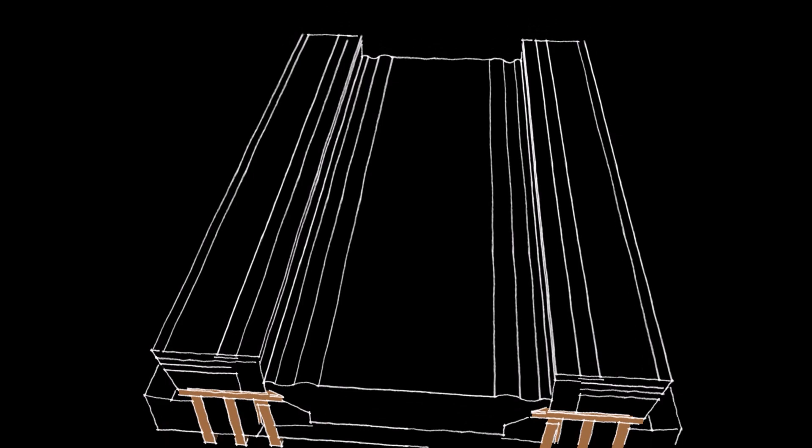The canals of Amsterdam, the pride of the Dutch culture, and the symbol of conquering nature. Did you know that those canals are protected by walls that are built on top of wooden piles? Those walls are called quay walls. Amsterdam has a belt of 165 canals with a total length of 600 kilometers of quay walls.

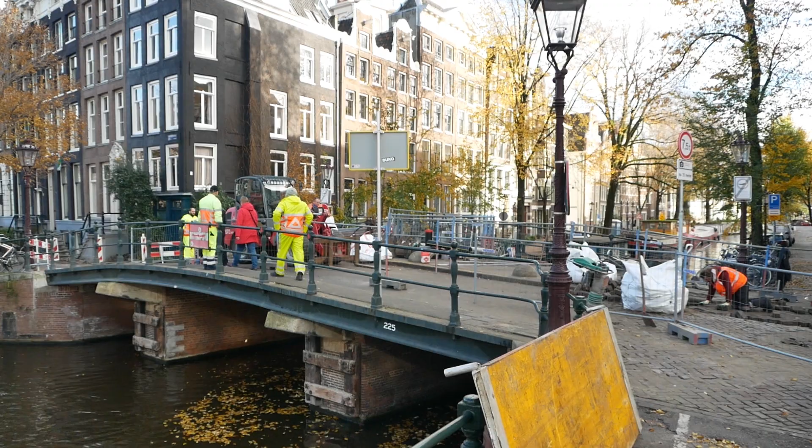Unfortunately, the quay walls in Amsterdam are falling apart since many of the wooden piles have shifted, cracked, or collapsed under the continuous pressure. Therefore, the municipality renovates the quay walls of Amsterdam over the coming 30 years to keep the city safe.

Since we are renovating them anyway, could it not be a chance to rethink the quay wall of the future? Imagine if this amount of quay walls can be utilized through harnessing energy. Since Amsterdam aims to be a natural gas-free city by 2040, could it be a good opportunity to integrate energy systems in the renewed quay walls?

A potential energy system for implementation is thermal energy from surface water, in Dutch called TEO system. This system has proven through research that it could provide 40% of the built environment's heat requirements in the Netherlands. The system retrieves heat from surface water bodies, like lakes, rivers, and canals. In this way, the houses of Amsterdam could be heated up and cooled down by your beloved historical canals.

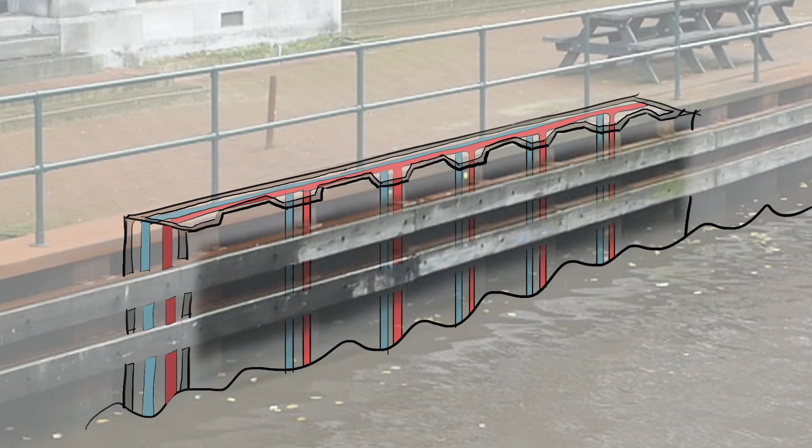But how does the system exactly work? There are two different types of TEO systems, open and closed. In a closed system, the heat exchanger is installed in the surface water. The liquid in the system does not come into contact with the surface water itself. The temperature of the heat is then increased by a heat pump and then transferred into the building.

Open TEO systems extract surface water, take the heat and discharge the water back into the water body. The temperature of the heat is then increased by the heat pump and then transferred into the building. Closed systems are usually installed on a smaller scale compared to the open systems.

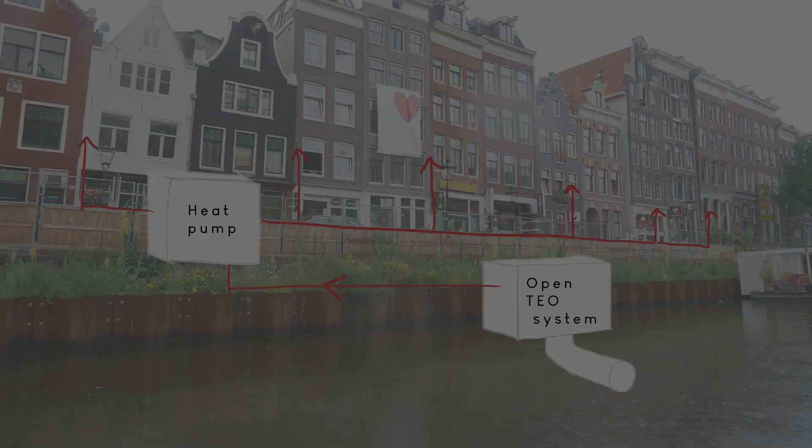The heat can be stored underground by aquifer thermal energy storage, also called ATES. This way, we can extract the heat in the summer and extract the cold in winter and save it for later. Even though the system already works and it is proven to be effective, why is the implementation so far away from the present? We talked to several experts of TEO systems and asked them the question, what is the main challenge for implementing a TEO system in the quay walls of Amsterdam?

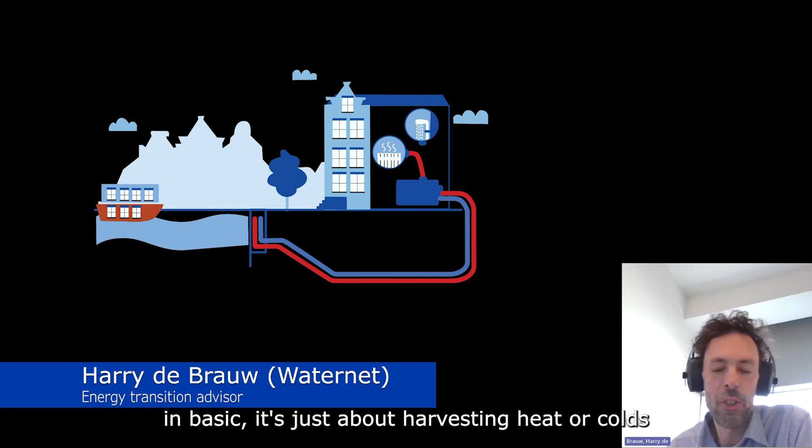You already know the TEO system and how it works, but we would like to know how you would define the TEO system. Okay. In basic, it's just about harvesting heat or cold from surface water. Period. And in practice, it means you want to utilize it, so that something comes after that. So you need to deliver it to houses, or maybe you have to store it in an ATES system, but just TEO is just about pumping water through an installation, extracting thermal energy.

Could you name some disadvantages of implementing a TEO system in quay walls? Well, the idea is that we have to replace about 200 kilometers of quay wall in Amsterdam, so that is an opportunity. If you are working already on it, then you might as well implement an inlet and an outlet in it. So that's, I think, mainly an opportunity.

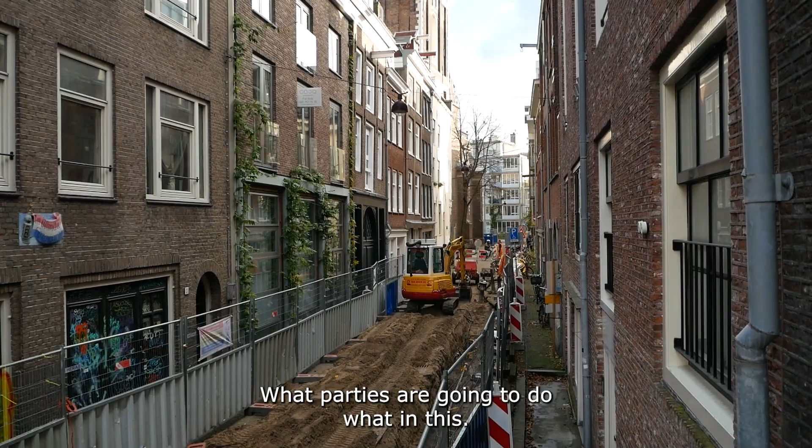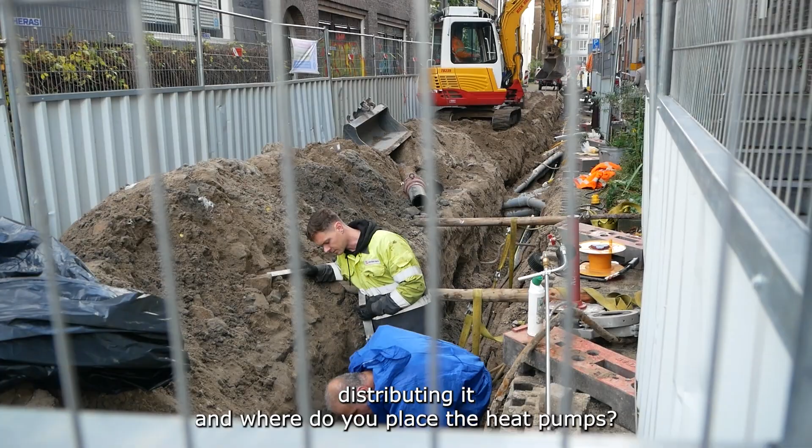I think the governance is very difficult. How to organize it, what parties are going to do what in this. So you have somebody who's to take care of the source, operate it, and then somebody who's taking care of distributing it, and where do you place the heat pumps. You need a lot of space, I think, and it's difficult to find that space.

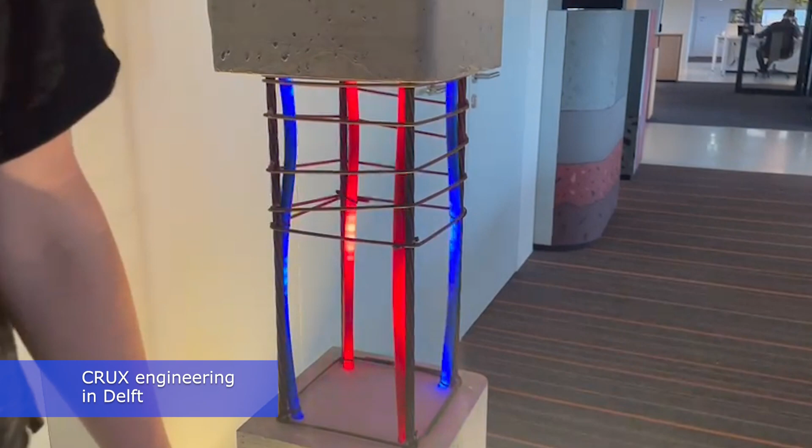Matching the investment on the quay side with a possible consumer a few years in the future, that's very hard for, I think, a lot of people, but mostly for municipalities to actually take into account when they're making their budgets. And that's an issue because the quay was renovated for a technical lifespan of 100 years. So if in 5 years or 10 years someone said, I need heat and I need it here, then they're too late because the quay has already been renovated.

We let the different stakeholders discuss the barriers together. It makes sense also to start implementing that now. It's not opened every day, so it's only during the asset management cycle. So they are also usually not the owners of the installation that is put in their houses. The outcome was that raising awareness and understanding future scenarios is currently needed.

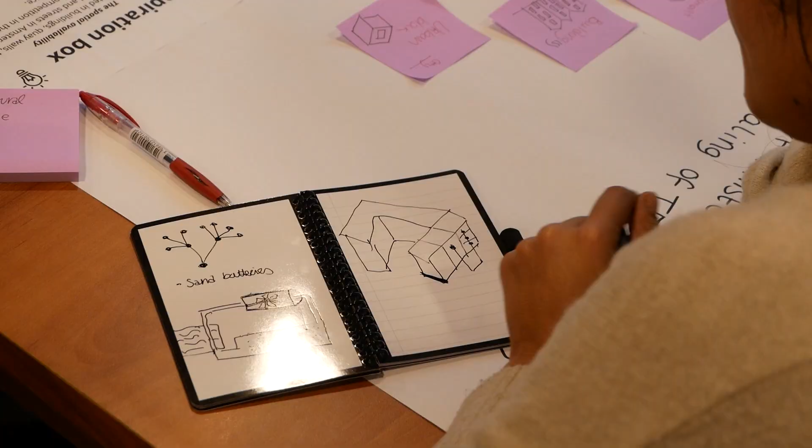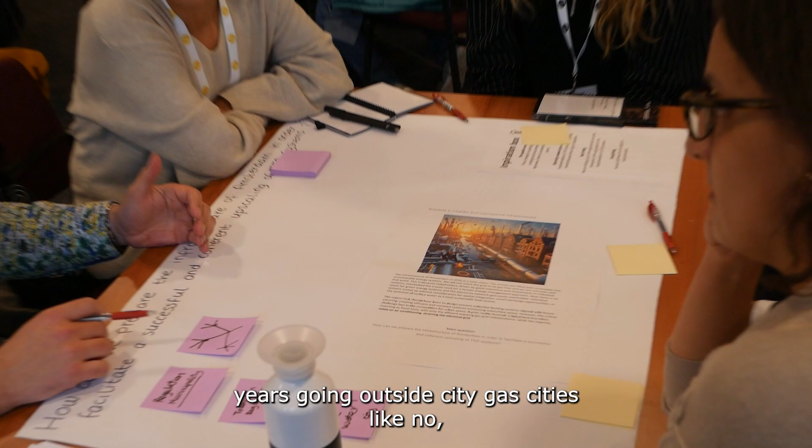To find solutions for the future, we organized a session at Symposium Future Horizons of the Urban Energy Transition at TU Delft. To be honest, for instance, instead of talking about lithium batteries to store energy, why don't we use the heat network or the water to store energy in some ways? Yeah. About 50 years ago in Amsterdam we had city gas. So the city supplied gas to the whole city. You need to go back to a system like that. You need to have a city-wide program.

If we want to implement a TEO system in the quay walls, it should be integrated with other technologies, resolve ownership issues, monitor effects on the environment with, for instance, sensors, and the infrastructure needs to be adjusted to the new energy systems. To convey the urgency of the heat transition and to propose aquathermal energy from surface water as a possibility, we composed a book. The book describes 2 scenarios, one doom scenario and one good scenario.

The first doom scenario regarding infrastructure sketches a futuristic Amsterdam where quay walls were quickly and structurally well fixed. However, the management of the energy transition has been neglected, resulting in scattered individual systems, leading to an overloaded energy grid. In the good scenario, the thoughtful design of the renovated quay walls allows seamless and standardized integration of TEO systems.

In the next doom scenario, we talk about injustice. TEO systems in 2050s Amsterdam are exclusively for the wealthiest, leaving others in the cold. In a good, just scenario, the government asked the people for their perception of justice during the whole implementation of a TEO system, resulting in TEO systems being owned by different organizations who are now able to distribute energy between neighborhoods.